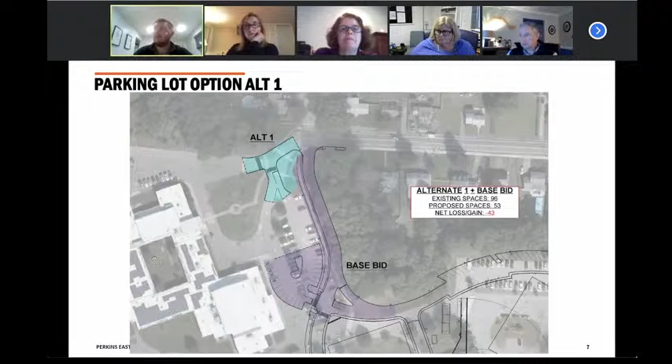We have 3 options for the committee to consider. Thank you, Walter. My only question, and I'm assuming you'll get to it as we run through options, is during this last bulk of the project, there wasn't anything that came up that was new or unanticipated or that hadn't been previously discussed - is that correct? Nothing that hadn't been previously discussed.

What we've done is we had a consideration for enhancing the septic fields prior. At this point our design is a little more developed on that, and more information has been provided. We've come up with an alternative within that scoping exercise that we do feel the committee should highly consider including in the project at this point. It's not to say that in a month or so it won't be flushed out that it's not needed, but at this point, with where the budget is, I know PMA and Perkins both feel it would be in the best interest of the project to include the number that's out there. We'll get to that in the Excel sheet. Any other questions on the estimates?

All right, I am going to jump over to the Excel sheet. So what we've done here is pre-populated what the options are that PMA feel would be in the best interest of the committee based on our knowledge of what we feel you guys have relayed to us and what we've done. So I'll go back and forth on the parking lot so everyone can see.

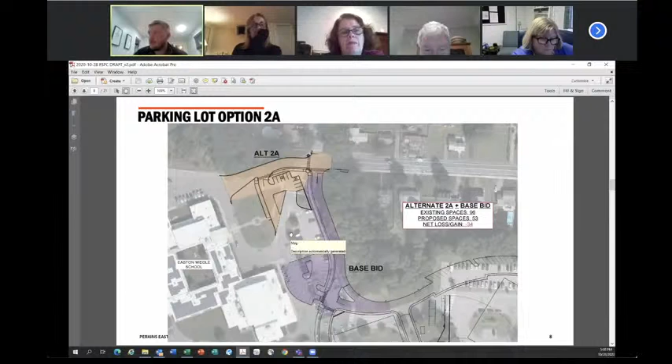And then phase 2B, and I'm sorry, I don't have these labeled correctly. I will update this before it goes back out. We had some nomenclature issue. But that would include the entire scope of revamping that parking lot, inclusive of this area right here, which we know has been discussed, the flagpole and the walking path.

If we jump back to the Excel sheet, we also have the septic field design alternative. What this is adding 10,800 square feet of leaching field Perc-Rite. And that's carried at a value of about $233,000.

And then the last item for consideration, and we have a couple slides, and I'll let Dawn and Dan kind of speak to it. But this is kind of a progression of the proposal, working with the students and the history, and other art and graphic displays and visual displays that have been proposed and discussed in the meetings with those students and the ideas they've come up with, and basically a budget placeholder for what Perkins feels could be designed with their ideas within the budget.

What I'll say is we've pre-populated that with having the 4 bottom items. It wouldn't be viable to do number 1 because you'd be replacing it with 2A for the parking. With those 4 items, inclusive of the estimates, if those are all accepted, the project would still be $892,000 under the project funding agreement.

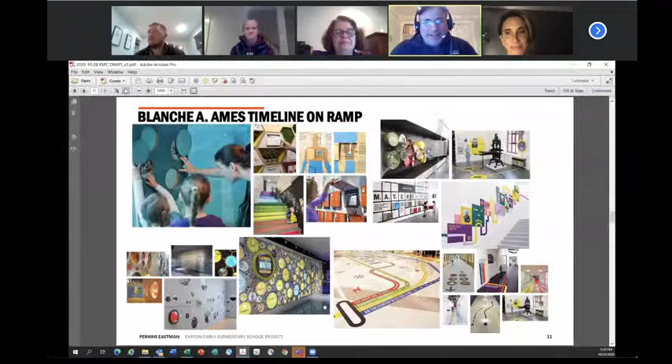I had the idea when they were presenting this that we should really think about branching this into the building deeper, and not just the ramp, but actually letting some of these tendrils go into the wings a little bit. There's a lot of opportunity here. And I think if my graphics team is cut loose, they're gonna create something really great.

We're also engaging them. The 250 was kind of a placeholder that Walter spoke about earlier, but we're engaging them in other potential graphics locations like the iconic wall, hopefully as a wayfinding wall as you enter into each wing so that students can identify with color as well as theme. We've talked about and presented that prior. So there are other things under that umbrella of 250 as a placeholder that we're hopeful we might be able to include, as well as some of the Blanche patents and inventions within the makerspace, having opportunity to do some exciting things there, branching them into the wings as Dan proposed. So there's a handful of things we're wrapping our hands around now that we know we'll potentially have the money to do, if you guys are on board with that.

Lots of excitement around this. If I could add something, I was an observer because the whole point here is for these students to feel a sense of ownership of part of this big project, just having them really think about the fact that this is coming to life, and that someday they may walk through this building and see things that they actually designed. They were so excited about that. So the design is clearly the purpose of this whole thing. But I do want to add that the teacher in me couldn't miss the teachable moment of what this experience is doing for these kids, this real life experience that they're having that is just so rare and unique.

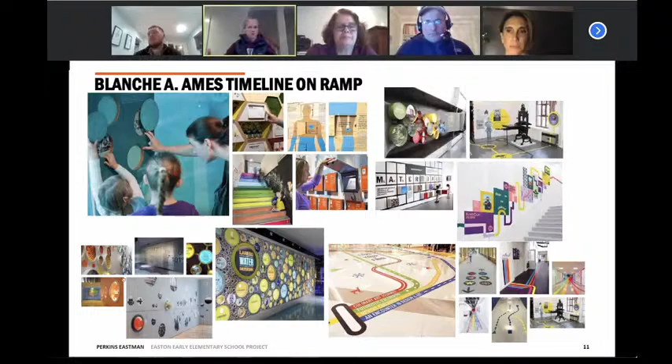I just want to put out there, if anyone has any thoughts or ideas or responses to any of it - this is for the students, but it's really for the town of Easton. So the experiences for these students help future students of Easton. If anyone has any strong feelings about anything, feel free to share them. We are open to suggestions. No decisions have been made except that there will be this experience for the students. So please share if you have any thoughts.

Can we see the Excel sheet again? Absolutely.

I'm sorry, I didn't understand this the first time, but is this figure with the expectation that 2B is the option that will be done in terms of the parking lot? No, it would be both 2A and 2B. Let me jump to the slides. This includes full scope of those - it would be this in the orange and then this in the green as well.

Which results in a few more spaces than now, and a safer entryway and exit - and it looks like a much more appropriate handicap entrance parking. Is that handicap parking in the green in front? Yeah, I think if we say yes to this, then Traverse has to go back and actually design this new plaza entrance area.

Because likely this would be, like we've just blocked out the space and said we're gonna do it all, then put a budget in to do it all. I think they need to look at this and really decide what this all is gonna look like, because now we're redesigning the entire middle school entrance, because the base bid does not include the safer entrance up at Columbus.

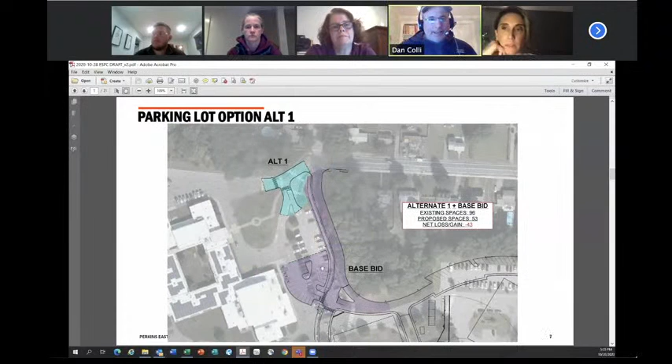The base bid - do you have that alternate one? Yeah, so we did talk about potentially putting this little alternate 1 piece, which is kind of the poor man's fix, at the top there. If we didn't have the budget, we would have suggested we try to do this to smooth out that end of Columbus Ave and make this entrance safer. It's really that curve right there where the end of Columbus Ave abruptly ends and curves right into the parking lot, where there needs to be more space.

And this was developed as kind of the safety, less expensive, let's-address-it option. But I don't think we're there. This actually sets the middle school back because you're losing almost 50 spaces. Yes, all it does is create a safer entry. It creates a good entry, but it does not help you with parking at all.

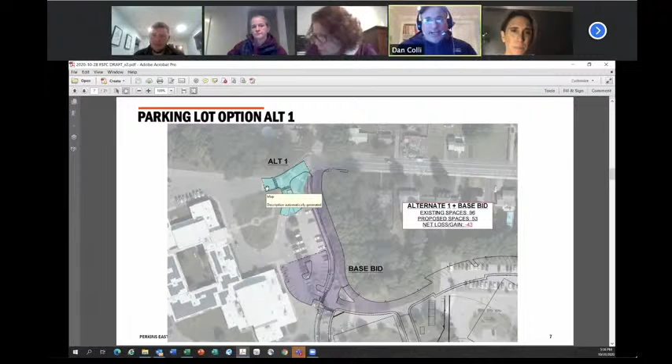So it's not really on the table, because your budget situation is such that you should consider doing all of it - just add the couple of spots, gain a few spots, and reorganize it all. So they're 2A and 2B. Each of those is a line item in the spreadsheet, correct? That is correct. And they are both checked as to be included or recommended right now.

Yeah, so if we do 2A and 2B - okay, never mind, I just answered my own question. We're not recommending that we do 1. 1 goes off, we don't accept it. And we do accept 2A and 2B - we accept those 4. Okay, got it.

So are there any other questions or comments on this from the committee? If not, I'm going to make a motion, but I want to give people a minute or two if they have any other questions.

Is this including the ceramic in the single-use bathrooms, or is that a conversation for another day? It is not, right now. But couldn't we floor amend it right now and just throw it in there?

Walter, I did it on the SharePoint file. You're working off your desktop, probably. I am working off my desktop. I'll reopen it quickly.

I don't want to assume for myself or for people who might watch this and wonder why we're making these kinds of decisions. When you say it improves the durability, are you talking about the difference between ceramic tile and drywall in the bathrooms for the young kids?

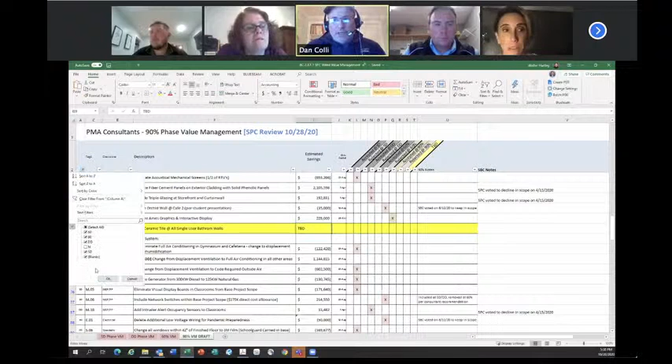So any of us with kids can picture someone hurling a toy at a drywall and putting a hole in it. Ceramic is more durable. Is that what you're saying? Yes. And it doesn't need to be painted over. If it gets wet, it doesn't get damaged. Okay, thank you.

So that's where it would land. We'd still be at the total. So what's the total of what you're asking us to accept this evening if we include the ceramic? Sorry, I can't see the spreadsheet, my computer screen is acting up. No problem.

$923,535. And that assumes that we need the full septic leaching field there, which we may not even need.

And so what we haven't accounted for in terms of these bids, or in terms of this estimate... 842,000, am I reading that right? That we're under—does that just roll over into contingency? Where does that delta go?

That delta is your safety for your bid. It does not roll over into anything. Once the bid comes in, the bid would be finalized, pending any acceptance of alternates.

Okay, thank you. That was one of the reasons why we were looking for things to offer, because we want to try to get you closer to your budget if we can. If there was anything that we left on the table because we thought we needed to save money or we thought we were going to be too close, now's the time to try to put those things back in, or anything anybody on this committee feels needs to be in this project or should be considered, now would be the time to make that suggestion.

Sorry, let me go through my list. Cabral, yes. Carlson, yes. Fulgenetti, yes. O'Neill, yes. Reed, yes. Sobrai, yes. Stebbins, yes. Weintraub, yes. Wiseman, yes. Martin, yes. So that's that. That's great.